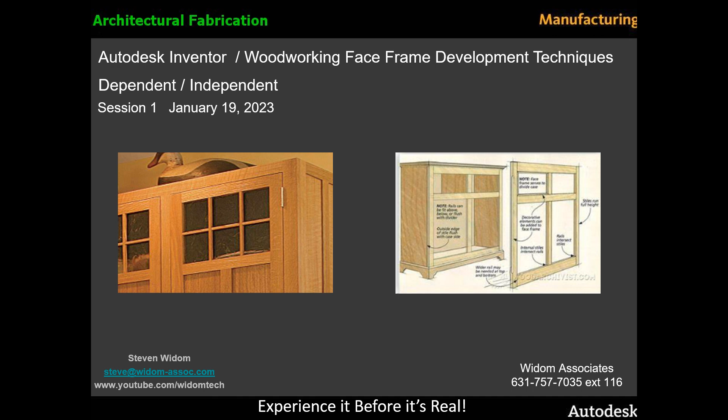Call to action: how can we help this account? They want to improve. Management says we want to improve. They're going to allow the users the time to learn, educate themselves, change their workflows. Workflows, that is the key. Not only the change of the approach to how we do things, but also to use some of the tools you've shied away from, or many accounts have shied away from, because they looked too difficult. Well, Inventor's not a difficult tool.

Many of our accounts have reached that state, follow the same guidelines, and have seen dramatic increases in their departments. Instead of hiring new people, they can use the people they have.

We decided to put together an example that hopefully will show the methods we're describing. We have a carcass made up of multiple parts. We have a face frame made up of multiple parts. Both of them are independent sub-assemblies. And of course, then we have the joinery, what allows us to attach them together, not just constrain them together, but some sort of woodworking joinery.

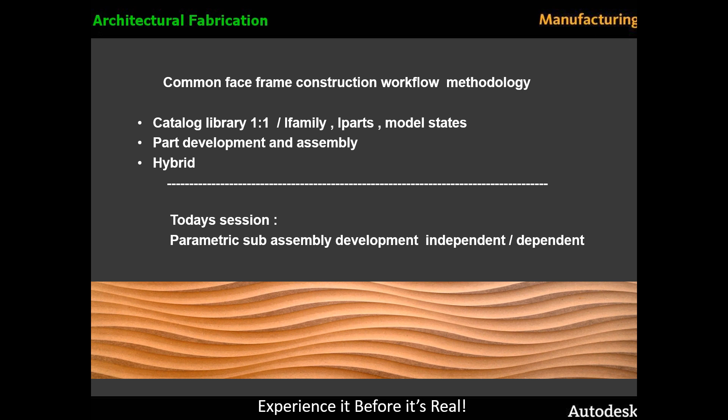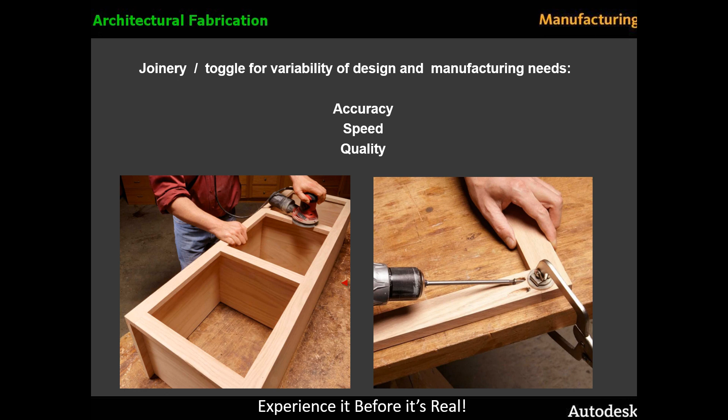Again, we're going to start using joinery now. Joinery that will allow us to bring in either store-bought components or components we create, that will give us accuracy and speed and quality, not only in the development of pilot holes, but also in its location. And of course, the usage of different types of joinery. If the product's already done and we need to switch it from biscuits to pocket screws, or pocket screws to dowels, or lock dowels, how can we automatically change everything in a job that's already been created?

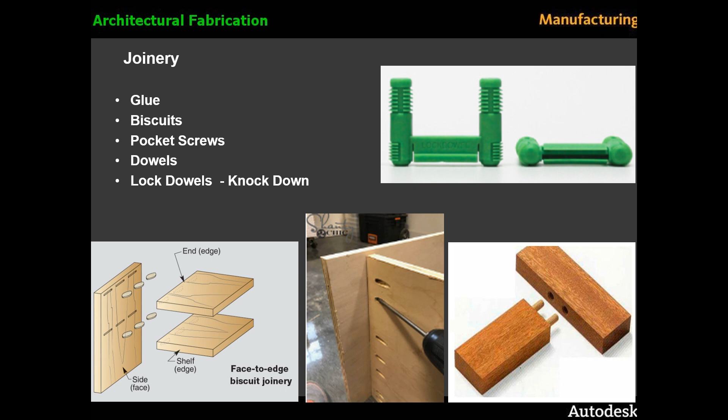We can approach this project by first discussing some library items. This carcass is a library item, very flexible, always based on the way we create it, the joinery we use, the connection points we use, the dimensional information we use. So step one is to set this up, but also make it so that it is very variable.

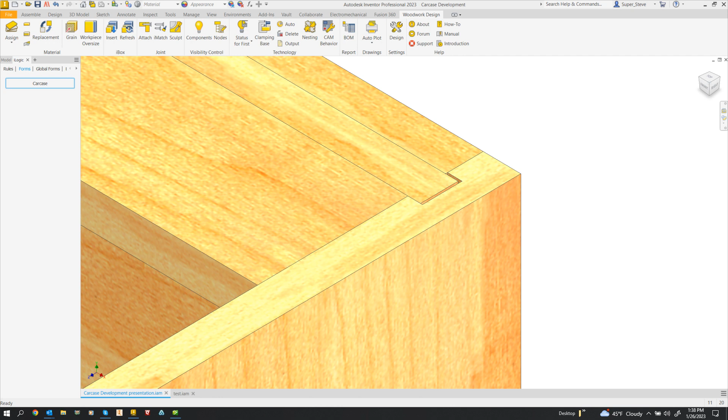So what do I mean by that? Well, first of all, the basic construction shows you clearances that are already in place, back panels, side panels. What I don't show is the actual joinery itself. Let's go into wireframe and you can see that. So really no joinery here, no dowels or biscuits, pocket screws, nothing, but obviously we do have clearances.

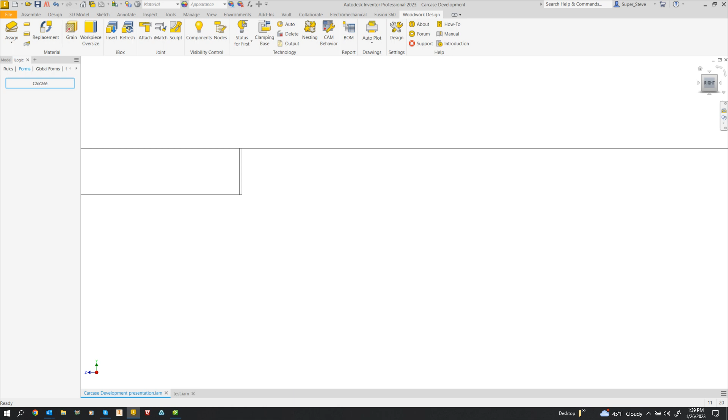We've always suggested to all of our end users start using iLogic, and in our iLogic forms you can see that there are many ways of augmenting this particular unit itself. Changing the width of it from 40 to 32, obviously you see that it is fully editable. Depth and height, core thickness. Core thickness refers to everything but the back panel. And if I change the back panel here, and let's make it 3/8 of an inch, 0.375, you can see it's adjusted completely, but also maintain clearances. Very important on the machining side of things.

Also in here, you'll see that we have the ability to change this vertical panel.

Right now it's set at 12 inches. Let's make it 15 inches, and it's adjusting as we go. So the point here is build your libraries in a way that will allow you to change them.

Comfortably, the way you might think jobs of your nature, the nature of your company, would work. You're not going to catch everything, but you can most likely get 50% more than a standard library item that's very difficult to change. The other thing we try to do is think for the future.

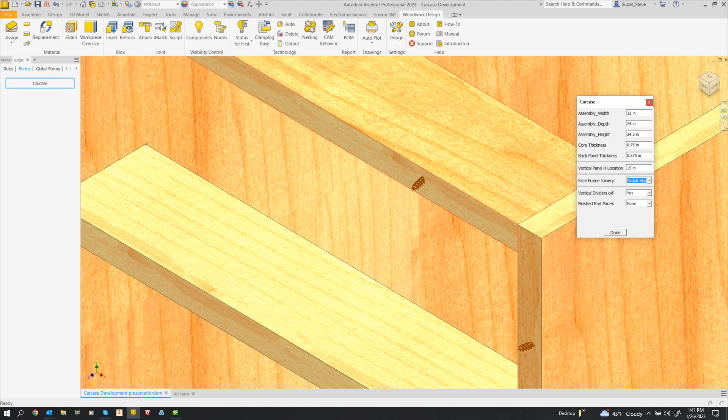So if I say I want to use biscuits or pocket screws, you can see that all the pocket screws have just been added to this particular model. And of course, by changing the width of the unit, the pocket screws adjust accordingly, maintaining center lines and maybe 3 or 4 inches from each side.

If we didn't want pocket screws and we wanted biscuits, we're now changing them to biscuits. Or, of course, lock dowels, and we see we have lock dowels.

Now, what I don't have is the actual pilot holes or the construction that needs to be machined. So I'll go back to pocket screws, which is what I've just done. And what I'll now do is sculpt it. What sculpt does is it adds all the pilot hole information that's necessary.

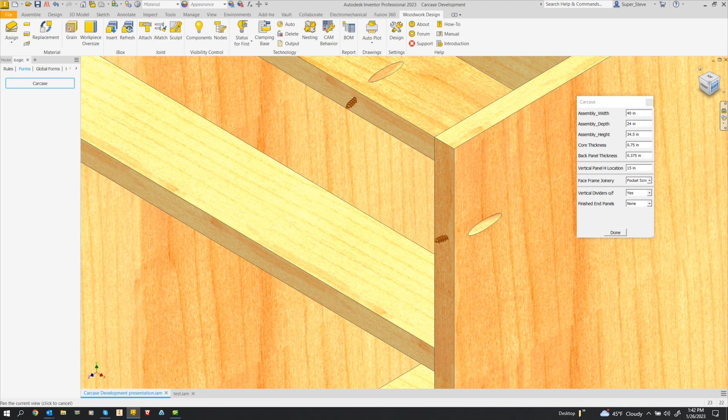Fairly straightforward, I would think. Let's turn the shading off so you can actually see the reality of what it's going to do. Now, whether or not you machine on a CNC router, or this is just for location for the shop, it really doesn't matter. It's just very simple in terms of the creation of this data.

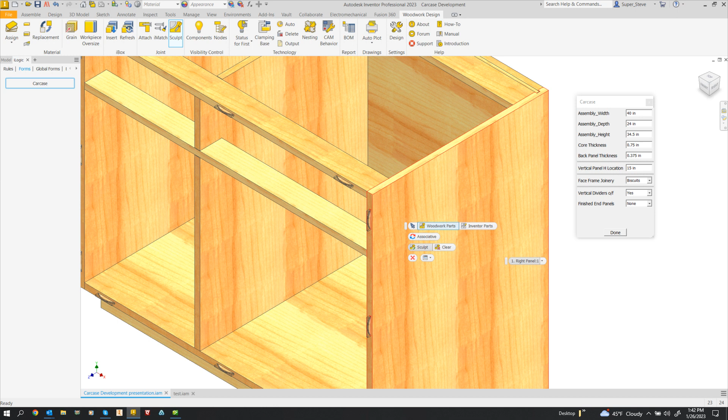If we didn't decide on having pocket screws and wanted biscuits instead, you can see we have biscuits, but the holes for the pocket screws still exist until I sculpt again. Then the pilot holes for the pocket screws go away, and the pilot boring for the biscuits gets added.

Let's just take a look at that, and I'll move one of these so we can see it. If we plan for change, when we know most jobs do change, then the result is a much more efficient, more accurate, and quicker process to our end result.

Looking at the end product, or considering the end product first, allows us to build into our iLogic forms some of that capability. Now, one other function that I've added to this carcass is considering whether or not the ends are finish ends or non-finish ends.

And with a finish end and a face frame, we might want to miter the sides, the left side and the right side of this particular unit. But if we do that, then the actual joinery might change.

So what we've done here is, when I've listed finished ends, I'll have several choices: none, which is what you see here, left only, right only, or I want both finish ends.

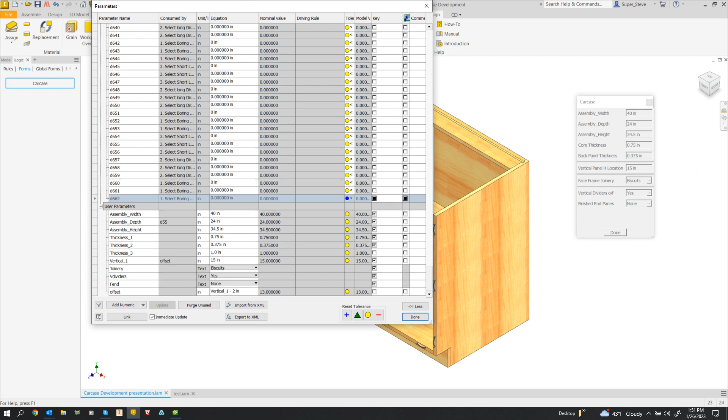Pick done and save our work. The second item we need to do is to stabilize the names of our parts in the browser - not in Windows Explorer, but in the browser. These names are very important not to change because our iLogic rules use these names, and if they've been changed, the rules don't match up.

Under the iLogic tab, we have external rules, which allow us to look into a folder on the network or local machine to find preset rules that we can run independently of whatever file we're in. We have a file called stabilize, and if I right click and run it, it locks up the file names so they don't change when I bring them into a new assembly.

The stabilize tool is nothing that gets shipped with Inventor. If you're not aware of it or need it, please get in touch with us and we'll email it over to you. So those are the two areas we need to address, and of course you pick save. That is our finished step to the carcass or to any subassembly.

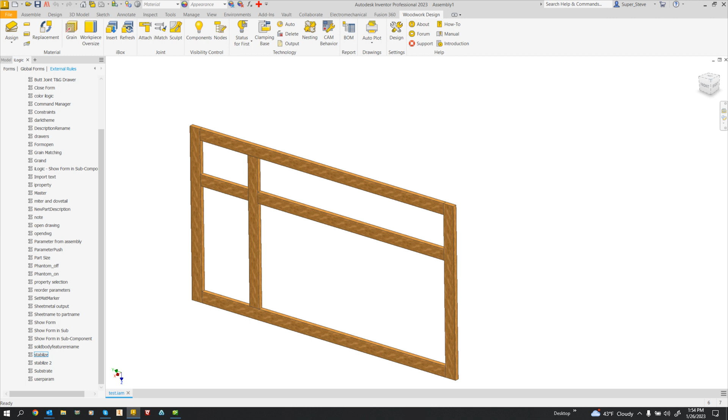Testing on the individual subassembly - we've accomplished our task up to this point and saved our work. Let me exit out of this, exit out of the face frame. I'll pick File, New, and let's create a job - a standard assembly. I'm in a standard assembly now and I'm picking Save.

I'll create a new folder and we'll call this Job 101. The Job 101 folder will create a top level assembly and I'll call it Room 1. So we're now in Room 1.

Now everybody does this - what's the difference between what I did and what you might have done? In our world, I already have parameters associated in the top level assembly: assembly width, assembly depth, assembly height. These are what I'll call global parameters - parameters that will follow any assembly put into this job. Maybe it's global thickness - you want to change the thickness of all the cabinets at once, all the fixtures at once, because the material that came in was scant and you need to adjust it and all the joints need to be adjusted. Again, workflow is the key here, thinking ahead.

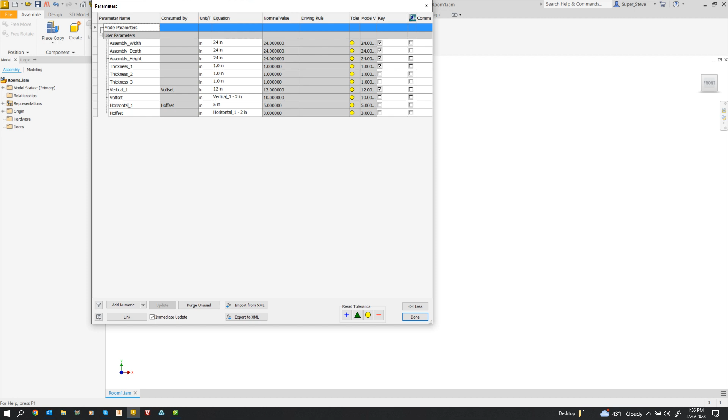You'll see these are very common names, and if you're an AutoCAD user, think of them like layers - they're sitting there waiting to be used if one wants to use them. And of course, they're key fields, items that will be prompted for. So it's sitting here just waiting for us.

In the blank assembly we just used as the template, we also have a form called global parameters, or whatever you'd like to call it. Those global parameters are listed so that if we change these, it'll change it on all the different component subassemblies or parts we bring into Room 1 - cabinet A, B, C, D, and so on. Again, changing workflow.

To take advantage of this workflow, there are certain do's and don'ts we always suggest. First, we don't use the Place command. Place command is something everybody's comfortable with - it's the method that allows you to take a subassembly or parts and bring it into your assembly at this point and then constrain it. If we do, it's a one-to-one relationship - library part as is to the assembly we're in.

If we do it again, it's the same thing, same copy or instance of the original - change one, it changes both. I want flexibility of bringing one in, bringing another one in, changing one without changing the other. So what we do instead is use Place iLogic.

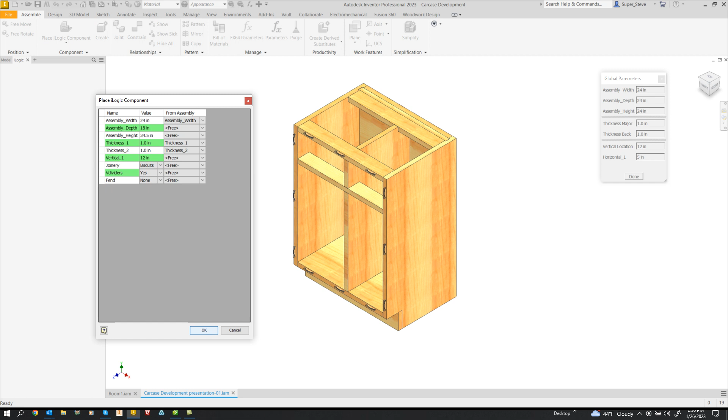And what this is doing now is it's building it, creating all the files associated with it, and I'm now placing it in room 1. Right click and I'll pick OK.

If I change the assembly width from 24 to 40, that's a global parameter, and that just changed. And I'm going to pick save and save my work.

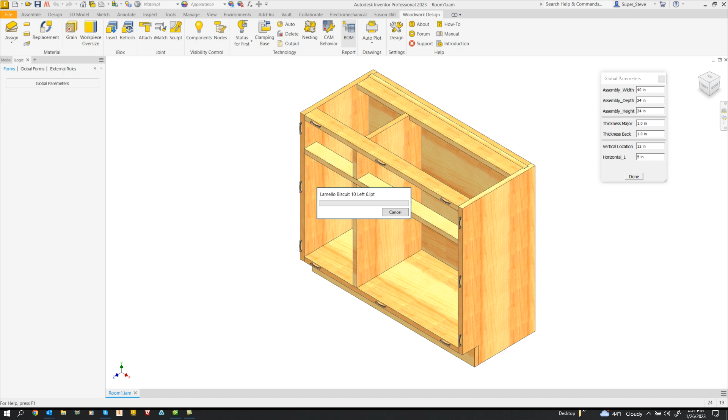So I brought the first item in, first subassembly in. If I want to verify and test it, obviously I can pick bill of material, and we have 3, 6, 12 lamellos here.

So you can see here's the first carcass. Here are the parts that make it up. There's 12 biscuits. All the sizes are what we want.

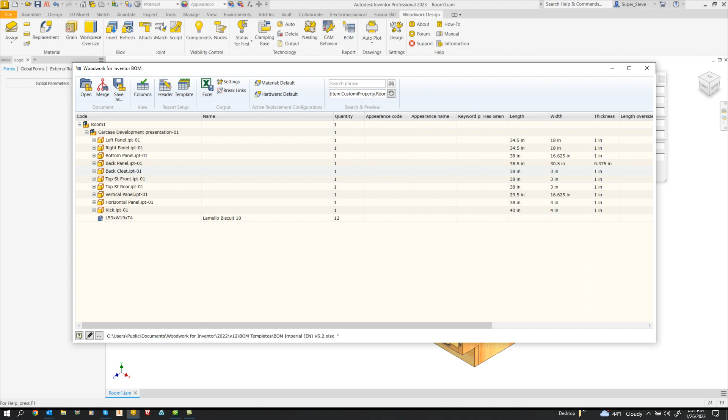And, you know, this back is a little too heavy. Let's change the thickness of that back to 3/8, 0.375. And that's now changed. And if we go into our bill of material, the back will be adjusted, as you can see here, 375 back panel.

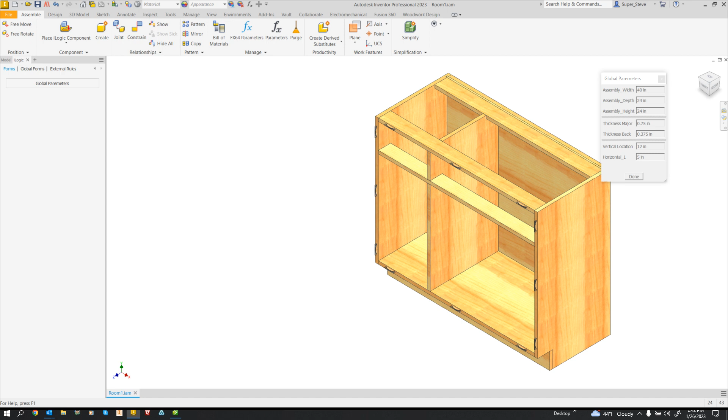Same environment pops up. It's prompting you for information. Here are the fields for global parameters. They're not associated yet. These are the fields for the unique parameters per part.

So the assembly width, I'll say assembly width. The depth of the cabinet, I'll leave it full. Height, I'll leave full. Thickness, I'll say thickness 1.

Okay, so we're going to control the width globally, the majority of the thicknesses, either in the backs or the rest of the units themselves.

This vertical, I'm going to say is 10 inches. That won't be global. The joinery this time won't be pocket screws.

Well, let's say it's a frameless cabinet. We're going to leave it as is. Let's say this cabinet didn't even have a vertical divider.

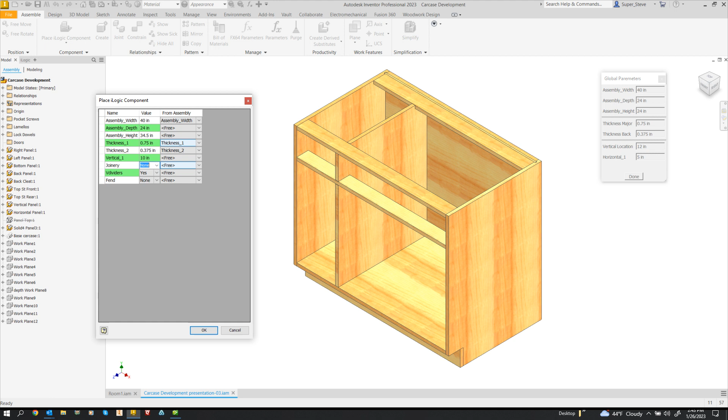So we'll say I don't want any vertical dividers here. Total change. But the items that are controllable will be these 3. And I pick OK.

And I place it. And pick Save.

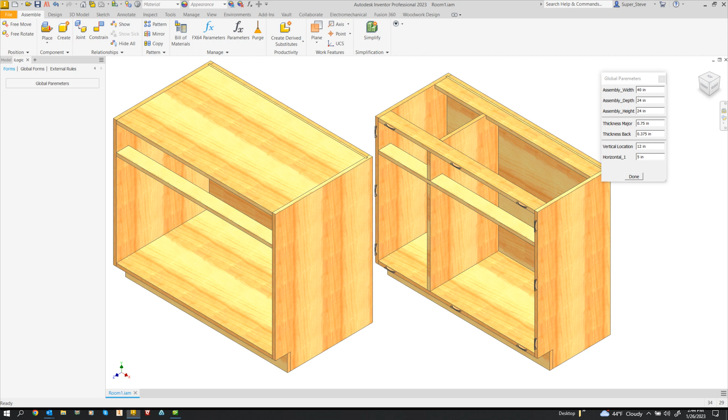Some simple testing. These are 2 unique units. They don't share any common parts at this moment. So if I activate this part, or this cabinet, and let's do something with this, okay? So let me just do a simple offset on here, okay?

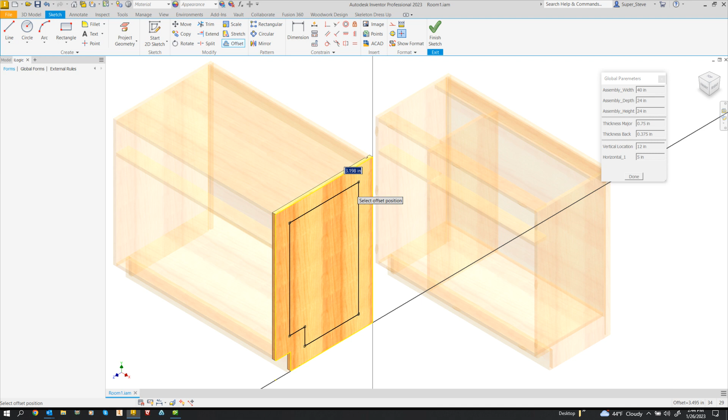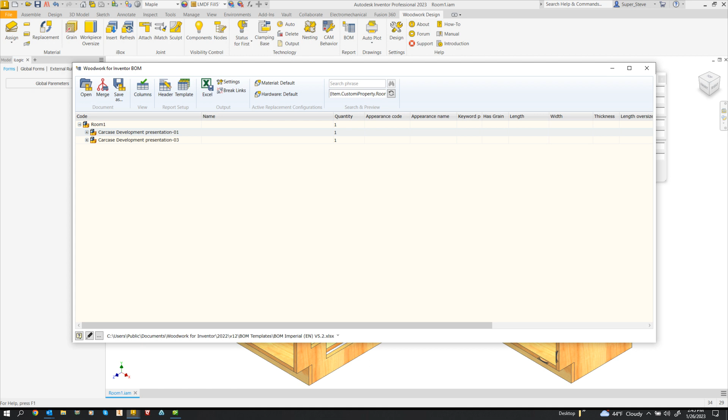And pick Save. Then you can see that I changed this unit here. It had no effect on that. Let's go into a bill of material. Well, it is saying that I have 2 carcasses, carcass 1 and carcass 2, whichever I named it. And you can see they're 2 totally unique units.

If I want to nest it, simple nest. You can see there's 12 biscuits here, no biscuits there.

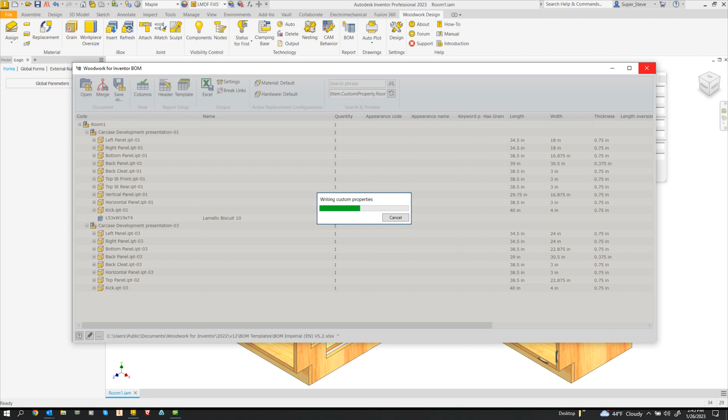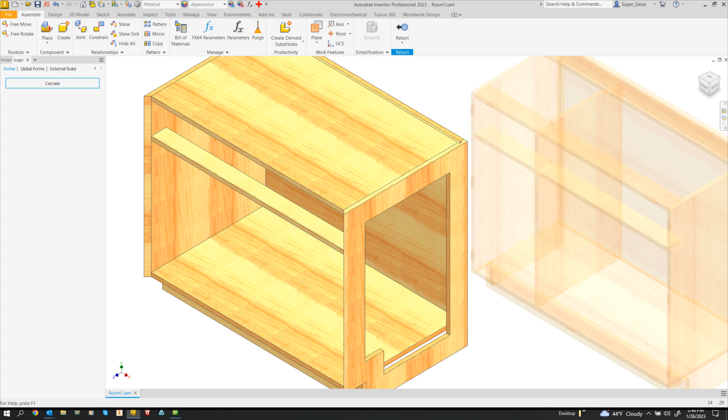If I wanted to add something to this, for example, finish ends on this, anytime I can just double click on it to activate it, go to the carcass, finish ends, both. As you can see, they're now finish ends. And again, they have no effect, really no effect on each other at this moment.

What's the payoff? I know what my client was looking for. I believe I do. He asked me for quality, speed, accuracy. He needs the functionality of a department that could be more efficient than what he has at the moment. He wants to grow his department. And I'm hoping to show you that some of these workflows allow for that.

We have 3 global parameters that we are controlling at this moment. Of course, we can have more. We have the width being controlled, the major thickness, and the back thickness being controlled. And all the others are being controlled independently. So you have a job with multiple fixtures in it, and you want to globally change all the thicknesses at once for the core and all the thicknesses for the backs at one time, and all the joinery changes automatically. Yeah, that's what we are doing here.

And when you're asked to do this and it's 4:45 on a Friday afternoon, this is not 2 hours. You're going home on time. This is 2 minutes worth of effort.

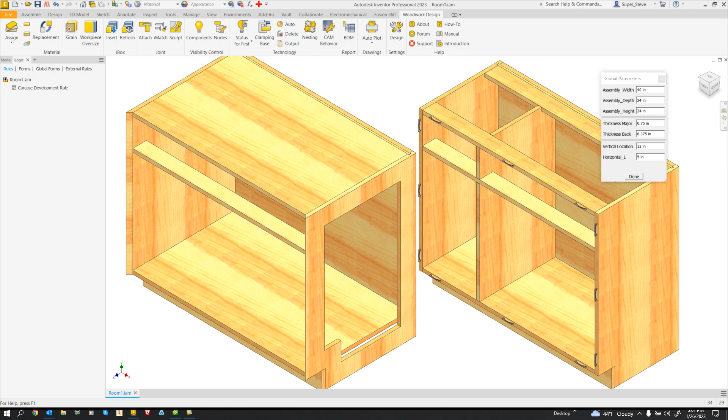Let's uncover where the changes are. In the model itself, in the browser, you'll see the 2 carcasses. It uses the name of the carcass to spell it out, in the browser that is. The first one and the second one.

In iLogic rules, it also creates a rule for you. If I right-click on that rule and pick Edit, the rule is already being created for you. It is saying the parameter within carcass 1, called assembly width, equals a global parameter. And it's saying exactly the same thing for carcass 2, assembly width equals that. So this is the hook right here.

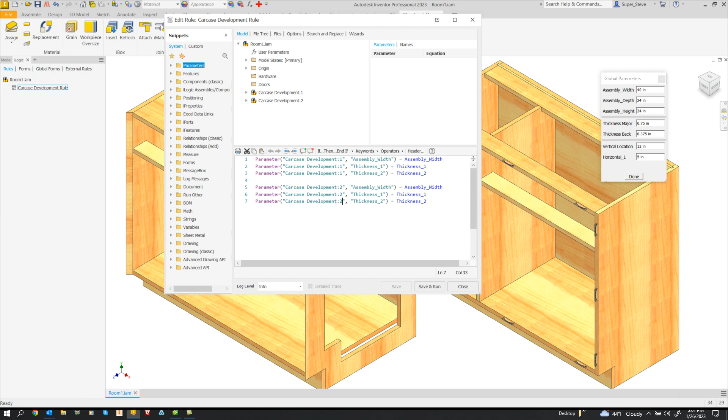Very, very straightforward. So let's make this work. You know they're independent of each other. So the assembly width is not going to be 40. It's going to be 55.

They both adjusted, and they're independent of each other. Okay, you can see that all the information has changed here. Okay, where the biscuits are.

Let's change the thickness to 1 1/4. I know that's heavy, but I wanted to show you that. Everything is now 1 1/4 thick.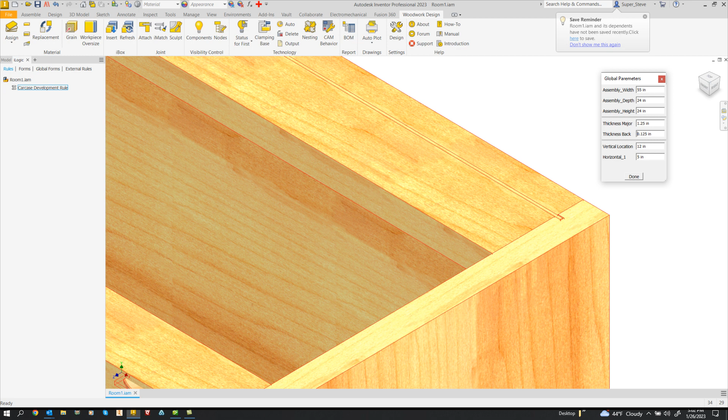And the back thickness, I'm going to make it 1/8 of an inch, 0.125. And you can see this adjusted to 1/8 of an inch, and this has adjusted to 1/8 of an inch. Again, let's make this 3/4, 0.75.

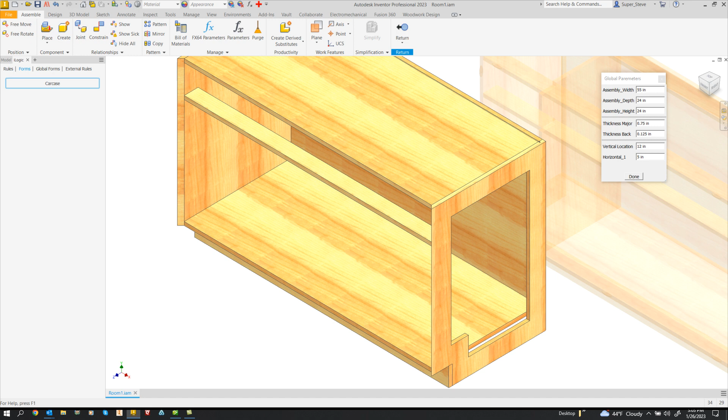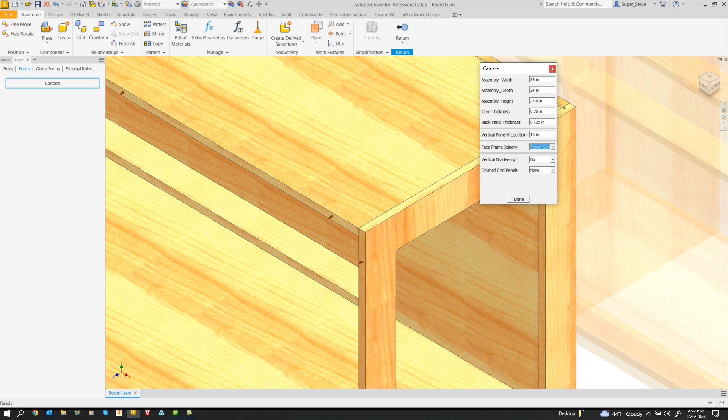And on this particular unit, I'll just double click on it. I'll go into the form, go to the carcass, and tell it that I want different joinery now. First of all, I don't want finish ends, and I would like pocket screws. And I'll sculpt.

Sculpt will create all the pilot information for machining, or for drawings for layout. So you can see all this is done, and it has no effect on the original here.

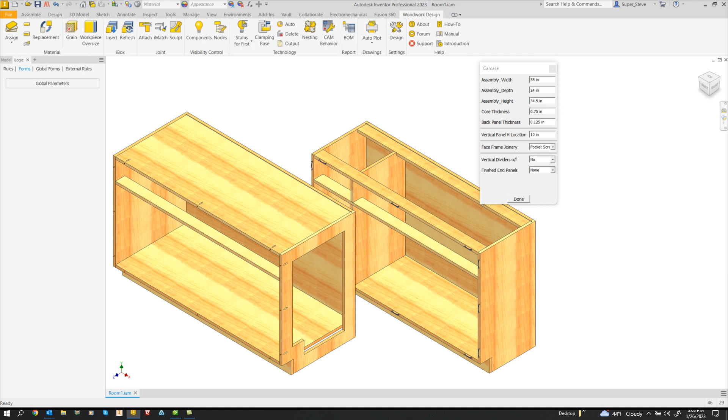And when I go out to a bill of material, you'll notice that in the 2 unique bills, okay, this is an indented bill. You can see we have pocket screws here and biscuits here, 12 and 12.

So let's try to sum this up. We have a carcass. You see all the control we have over it, either dependent or independent. And we have a face frame that is set up pretty much the same way. I want to put them together this time, totally independent subassemblies associated together.

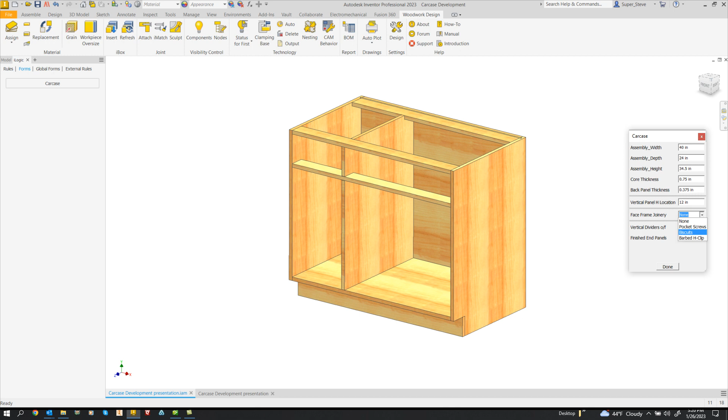So step 1 would be, what is the connection? How are they being joined? So let's go ahead and check the joinery out. I'm going to put a barbed H-clip as my joinery. If I sculpt this, it's going to drill all the holes associated with at least half of that joint. Let's go ahead and move one of those so we can take a look at it together.

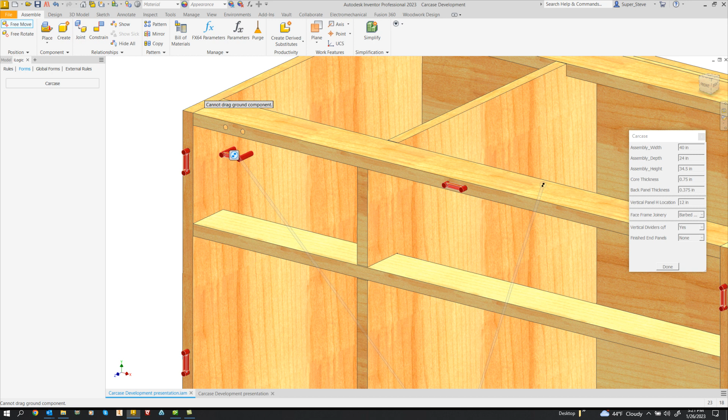See, on one side it's going to drill, the other side it's a press fit so that the whole face frame can be just snapped in place even without glue, and it'll hold. So these are just, again, some of the fun fixtures that are available. So we have that done.

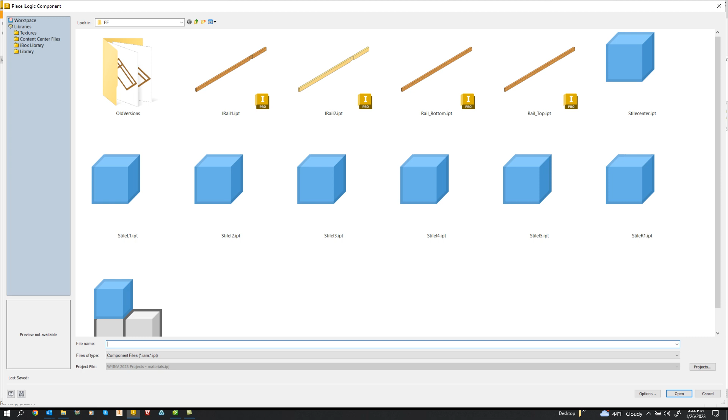Let's bring the face frame in. Again, it's not Place, it's Place iLogic. We'll go to the face frame folder. Let's see the large icons. You can see that this is the face frame.

It's going to prompt me for information right now. So the information it's prompting me for is, what is the height? Independent, dependent, global. What is the height? I'll leave that alone. What is the width? Well, the width is going to be the assembly width.

What is the thickness of the material? That's fine, we can leave it at that. What is this horizontal opening? Let's make that 4 inches for the moment.

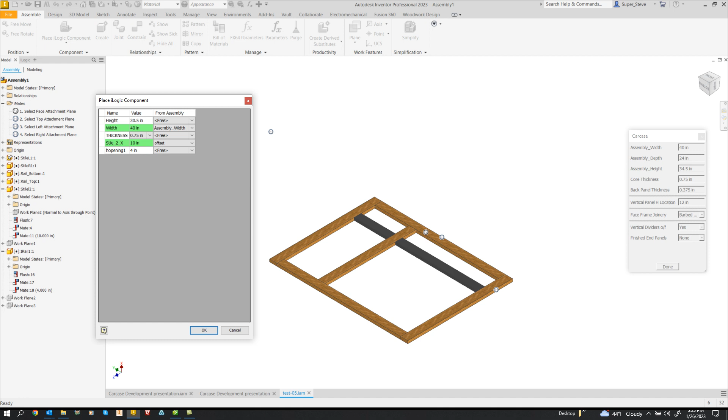So these are independent. This vertical, I want to be dependent, so I'm going to go ahead and pick the dependency variable, and pick OK. Bring it in, right click and OK. And let's pick Save.

Now, we do have built in right now a bill of material that will show the face frame. So let's go to bill of material. Let's take a look at it. Here's the information associated with the face frame.

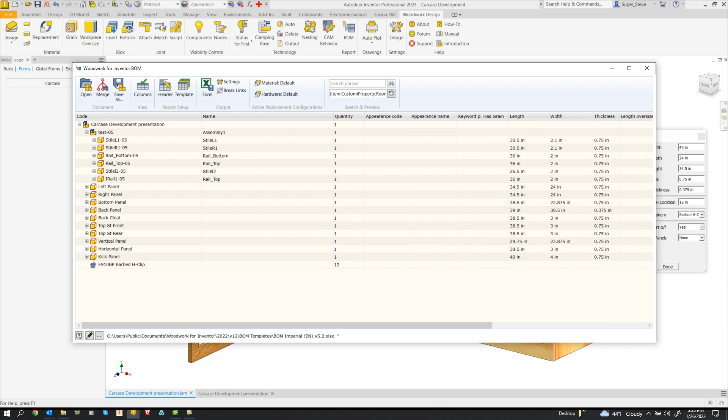Now attaching it. In previous seminars we showed you ways of using iMates and automating the attachment process, and I don't believe anything is quicker or more standardized for the department. So it's a tool called Attach. I pick Attach and I touch it, and it prompts me what to do.

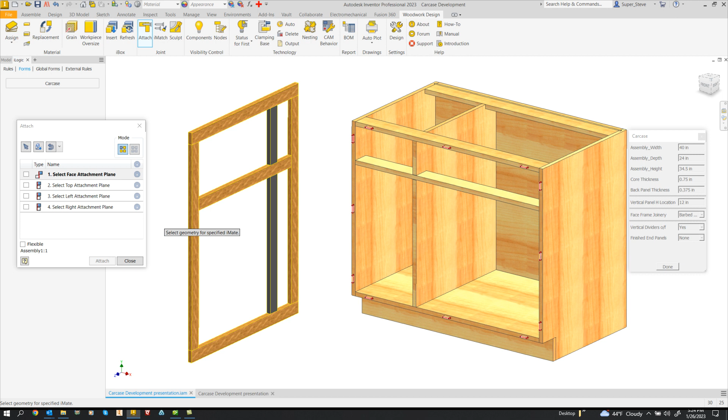Select the face I'm attaching it to, which is here. Select the top I'm attaching it to, which is here. And select the right-hand side I'm attaching it to, it's here. And that's now done. Pick Save. That way it's so consistent for everyone in the department to build the same way, constrain the same way. Again, more tools available to us.

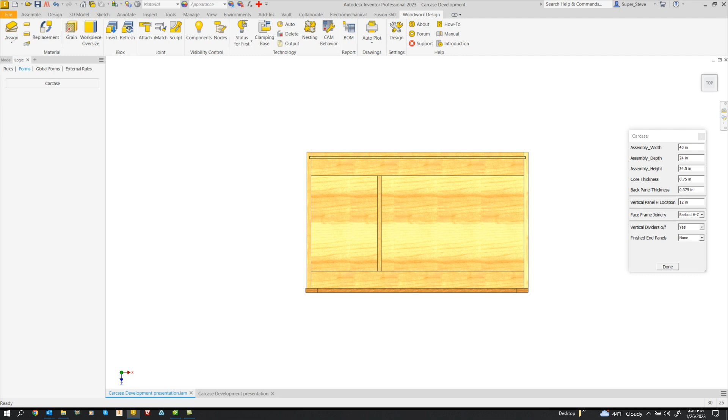If we take a look at it from the top view, you can see that these are... might have, let's see what we have here. Why does it look like I have a scribe? Let's take a look at that.

Activate the part, go into the form, scribe left and scribe right. If this was a 3-inch scribe, nope, got a 3-inch scribe there. Well, that should have been 0, and this should be 0. No scribe, unless I want it, of course.

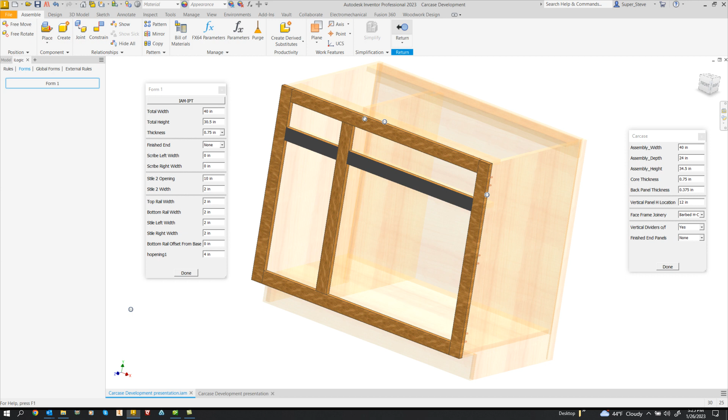Dependent or independent. Again, let's look at it now. Perfect fit. Perfect fit. Again, lots and lots of tools here for us to evaluate on how we want to approach a different workflow.

Okay, global variables now, assembly width. I'm going to make the width of this unit 50 inches. Face frame changes, carcass changes.

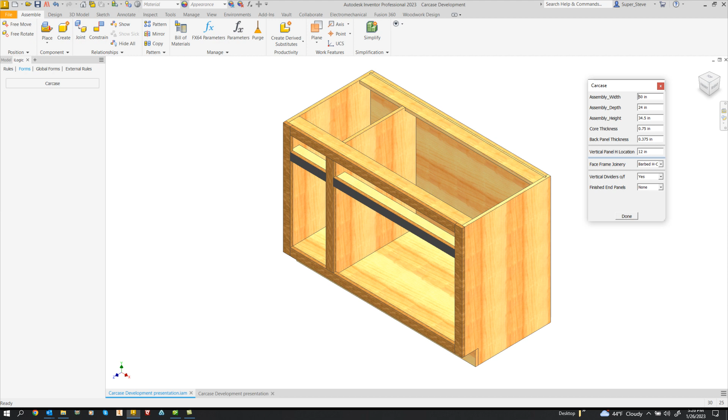I want to change the vertical here, okay? Vertical panel location is 12 inches. This is a 12-inch opening. I'm going to make it an 18-inch opening.

Nice and clean. What if I want to change the actual face frame joinery, or I want to change the vertical divider on and off? All of that is still available to you. I'm going to pick Save.

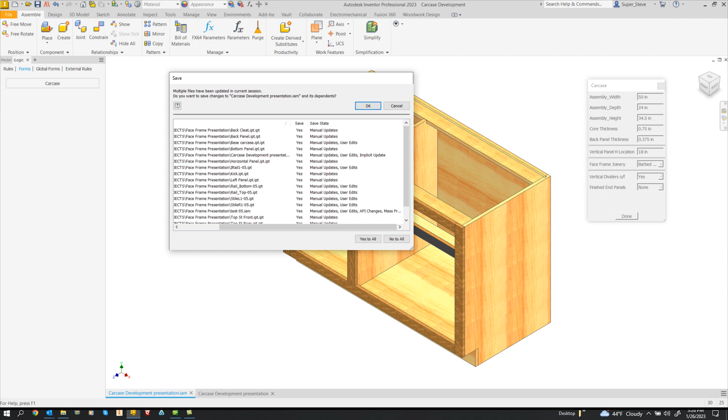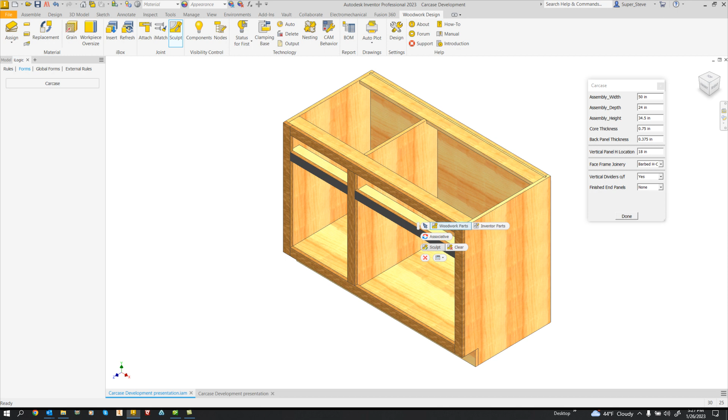And now I want to machine the back side of the face frame. Let's go ahead and sculpt. So just processed it. Let's open it up into its own file. Let me flip it over so we can see it a little bit better.

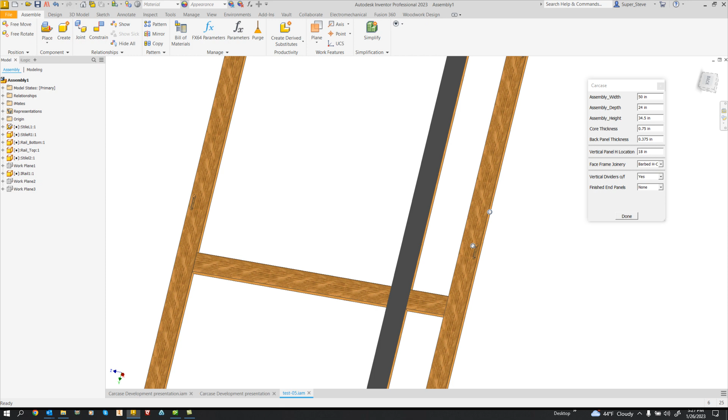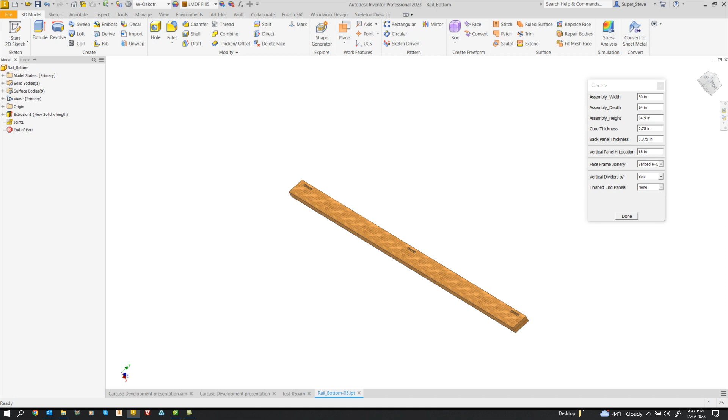And these are, of course, the lock dowel connectors that can go directly out to machining. And these are not assembly features. If I open up any of these independently, you can see they're at the part level, so they can be machined either manually, meaning with like a Festool device, or more directly on a CNC router, or any kind of boring tool. Okay.

Let's go back and look at this. Okay, looks good.